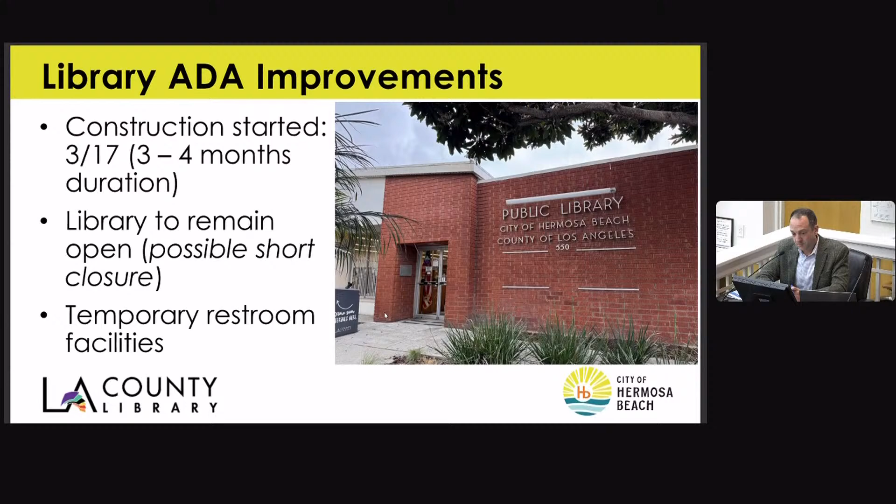And then, I did want to give an alert about ongoing issues at the beach.

And then finally, I want to give an update — Public Works has actively been working with Cal Water for several months now on the ongoing water main replacement project on Bayview Drive, from 2nd to 8th Street. They've concluded all the major work and were just wrapping up some box cover adjustments on the street. We also had to coordinate that with the LA County Sanitation District project that overlapped with it. That effort is now complete as well.

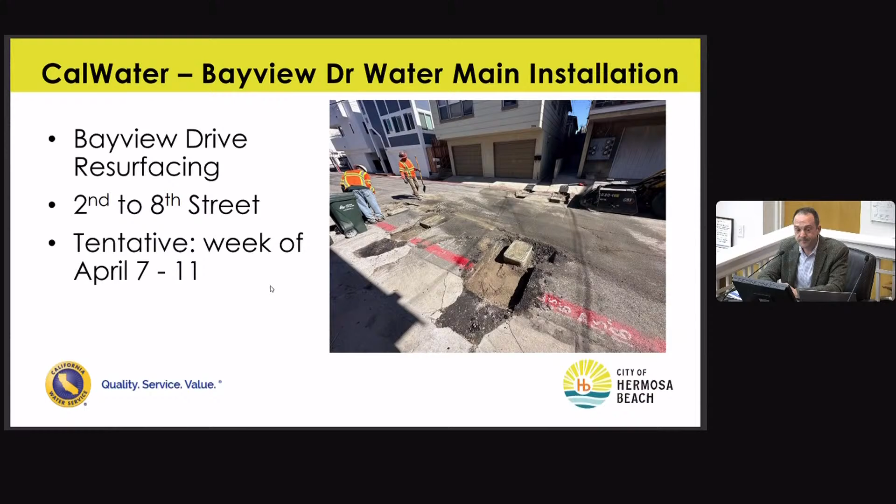We are tentatively set to do final resurfacing work on Bayview — a full grind and overlay of Bayview Drive. We're tentatively looking at the week of April 7th to complete that work, and additional notifications will go out to that neighborhood once it's final and confirmed. But that's what we're looking at right now to conclude that project. Those are my short updates tonight — happy to answer any questions you might have.

Any questions to my left? To my right? Just real quick on the Bayview resurfacing — is that part of the water project or part of the street improvement project? It's all part of the Cal Water project. They were going to do restoration, but there were so many lateral connections and major work done that it required a full grind and overlay. Otherwise, it would have been a lot of patchwork. Okay, thank you.

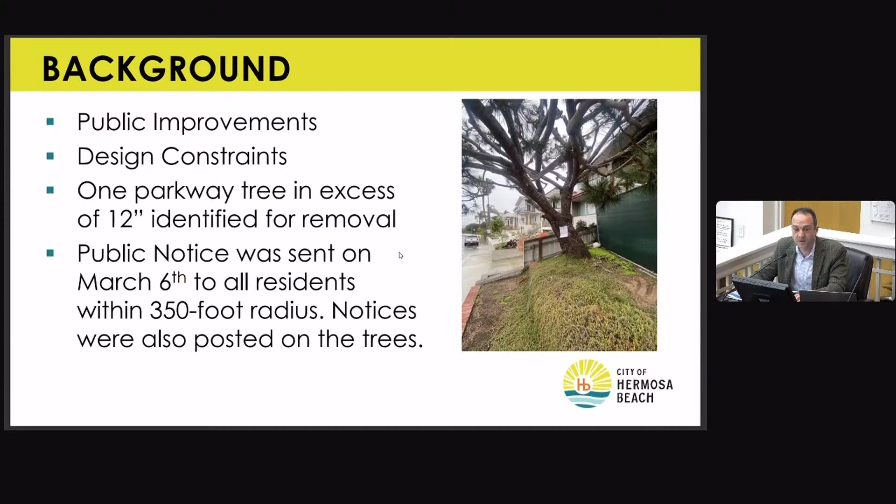The tree does exceed 12 inches in diameter, so it requires a public hearing for removal. Staff worked to issue notifications within a 350-foot radius of the area, and we also posted a notice on the tree, which is our standard practice for extra notification to the community. Here's a quick overview of where the property is on Monterey Boulevard — the tree is in the parkway behind the sidewalk in the frontage of the property.

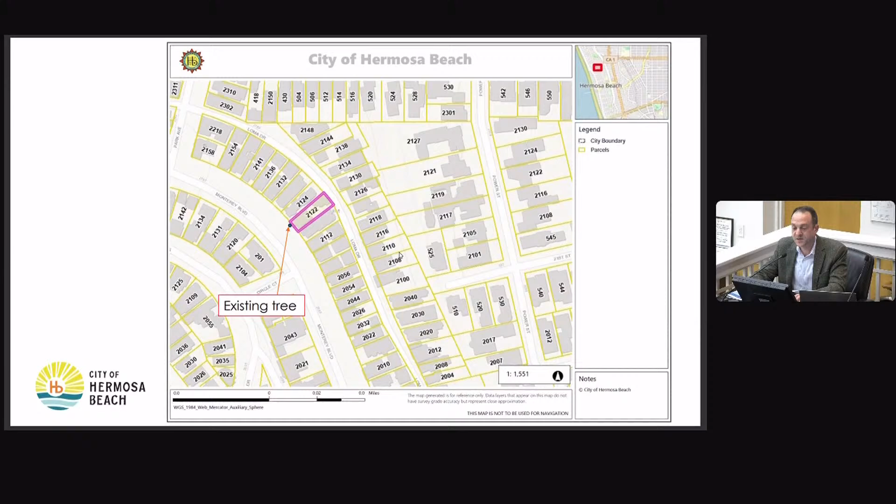This is a zoom in that shows the dimensions of the current layout. There's currently about a 5.5-foot wide sidewalk on Monterey Boulevard and about a 12.5-foot wide parkway that remains between the front property line and the back of sidewalk. The tree is located inside that 12.5-foot wide parkway location, shown in the green area.

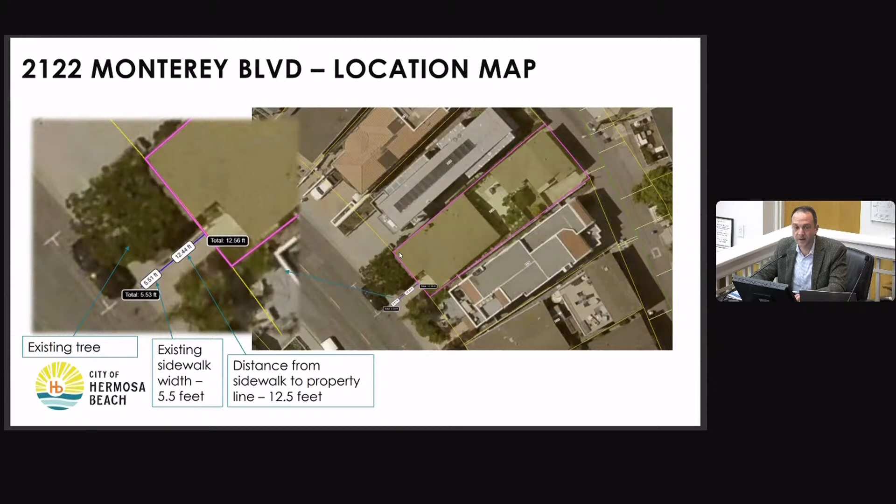The proposed condition would bring the current encroachment area up to conformance, consistent with Hermosa Beach Municipal Code Section 1216-130, which requires any substantial redevelopment exceeding 400 square feet to remove non-conforming elements from the encroachment area. We are working with the applicant to provide an encroachment permit for this area once they vacate the non-conforming structures, which include the retaining walls and the staircase.

The staircase is getting pulled back and rotated, I believe, 90 degrees, and pulled completely onto the property line, and all the retaining wall systems would be pulled back as well.

The challenge is that the tree, being 5 feet higher than the ground elevation, sits atop that wall, so it would be extremely difficult, if not impossible, for the tree to remain while removing the non-conforming encroachments from that area. So in order to comply with municipal code 1216-130, they are required to remove the tree as part of the project.

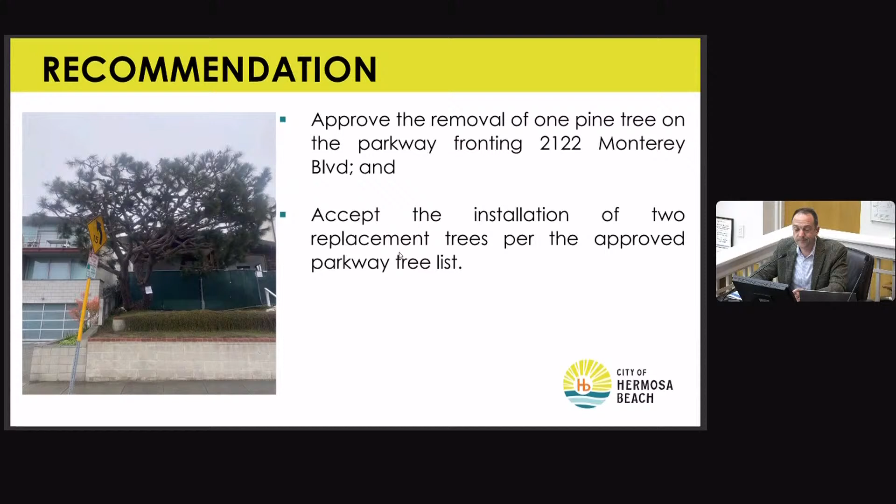So for tonight, the recommendation is for the commission to consider approval of removing this one tree and accepting the installation of 2 trees per the approved parkway tree list within the encroachment area. And that concludes my presentation.

Does anybody have any questions for staff?

I do. I had asked a question with one of the engineers, with Jonathan, before the meeting about the distance from the existing sidewalk to the property line. Is that not 14 feet, or maybe I got confused by that 12.5-foot number you had there?

Thank you, Commissioner Graith. I believe that it was an estimate of 14 feet, and he did clarify when he put together the slides for this evening that it's 12.5 feet. So it's a little bit less than what we thought. But the tree is within that area.

So, are we confident that the tree is in the public right-of-way and not on private property? It's absolutely in the public right-of-way, between the property line and the back of sidewalk. I have 100% confidence it's in the public right-of-way and not on private property. Okay, then I will defer to your 100% confidence, because maybe I made a measuring mistake today.

I was just going to, as part of my questioning, also disclose as part of my ex parte disclosure that I did do a site walk today. I saw the condition there. I noticed that there are retaining walls, and they actually occur in sort of a tiered fashion on 2 levels. The upper retaining wall, in some sense, surrounds a lot of the soil at about the level where the existing tree resides. It also looks like there's at least about 28 feet of frontage width on the property.

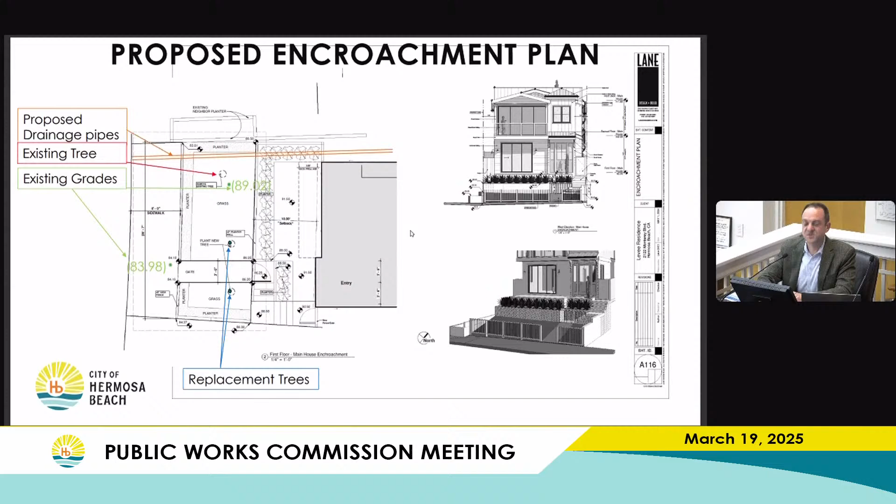Can you just put up the drawing that showed where the 2 trees are going to go? Absolutely. Thank you, Andrew. Okay, so they are on either side of the walkway, set back almost the same distance as the existing tree, perhaps a little bit further.

I guess my question is, is there a reason to not put them closer to the street? Although, can you tell me approximately what's the distance from the new tree to the house? My screen is terrible, so I can't see. There's a couple dimensions in there, but yeah, looking at it, it looks about 4 feet from the property line, about 3.5 to 4 feet from the property line.

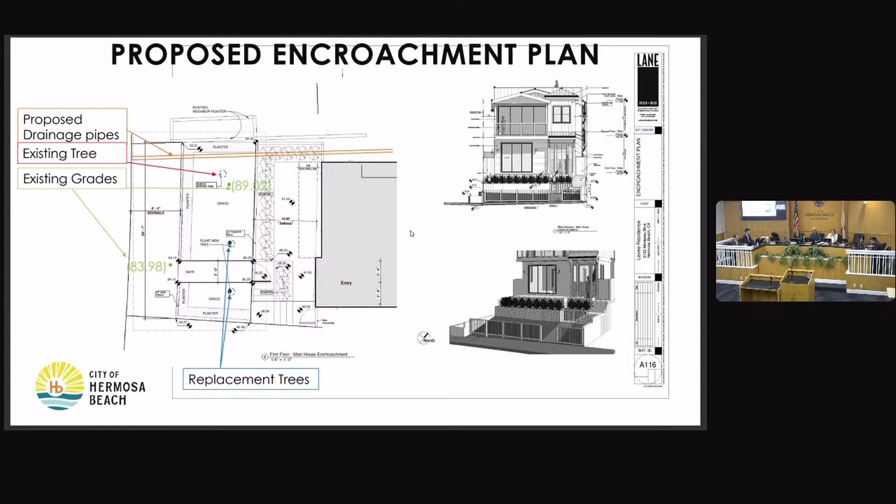My concern is because we see some trees are planted in the public right of way, but they get too close to the houses and interfere with gutters and stuff like that. So that would be...

Is that position set? Was it set by Public Works, or was it set by the homeowner? This was proposed by their design team, so we didn't make any requirement of where it was. This is their proposal for where those two trees would go.

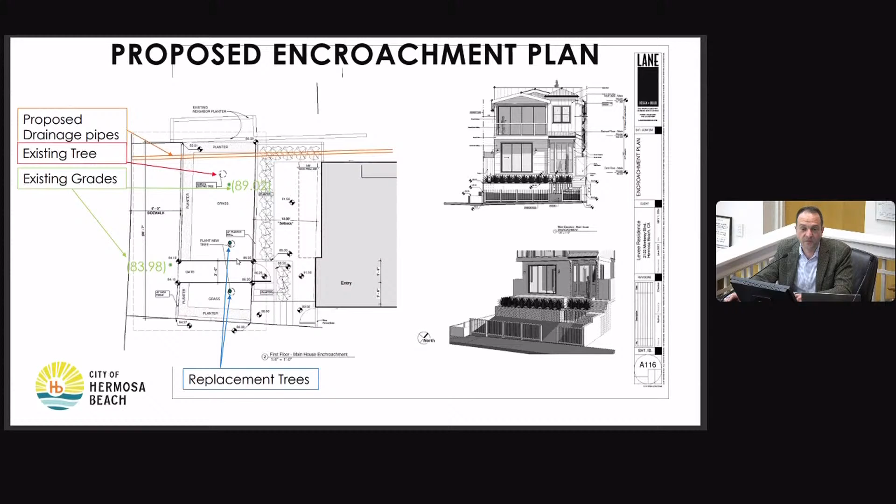Okay, alright, that's it. If there's no further questions, we move on to public comment. If there's anybody wishing to speak on this item, please speak now.

Hi, good evening. My name is Romaine Levy. I reside at 2415 Myrtle Avenue in Hermosa Beach, and I'm the homeowner at 2122 Monterey. My husband Tom is with me. Thank you to the Public Works Commission for your thorough report and for considering this issue.

And thank you to Commissioner Britton for your motion to hear this item earlier in the evening. We appreciate that. I am here just to confirm everything that I heard in the report tracks with our experience. We did our best to comply with everything that Public Works had asked for us to do on that encroachment space and encouraged our designers to comply in any way they could. We're sad to see a beautiful, thriving tree be taken out, but happy to replace it with two new ones that will hopefully grow to be as large and healthy as that one is. So we're excited to move forward, and thank you all for considering this tonight.

Thank you. Do you have any questions of us? No. Okay, anybody else? Thank you. Alright, that will close public comment.

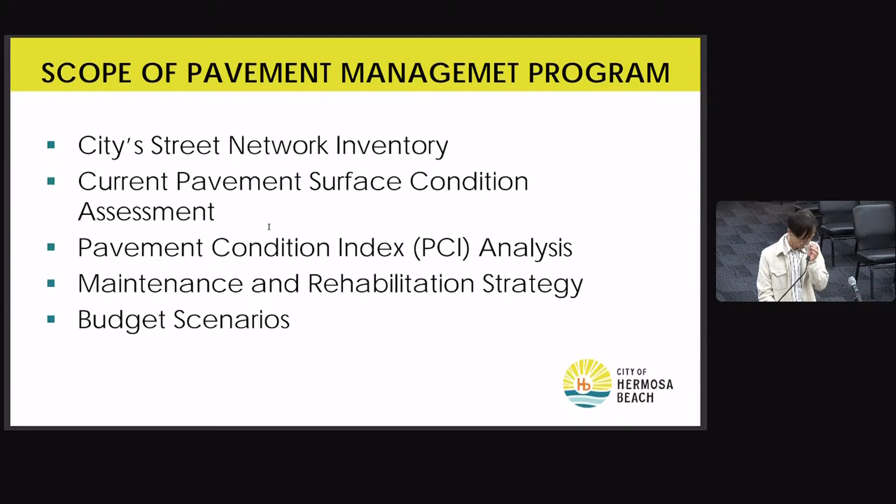The city network consists of arterial streets about 6.8 miles, collector streets about 10.3 miles, local streets about 30 miles, and alleyways of 0.5 miles, totaling 47.6 miles, excluding PCH and Walk Street. The PCH is maintained and owned by Caltrans.

The consultant assessed the current street and pavement condition, performing field observations in October 2024, visually observing all street conditions such as cracks and other types of distress.

An important term here is the pavement condition index, or PCI. This is the measurement of pavement grade or condition and ranges from 100 to 0. The PCI value is analyzed based on factors like climate, traffic load and volume, paving materials, age, and field observations. For example, a newly paved street will have a PCI of 100, but a street near the end of its service life will have a PCI of 40 or less.

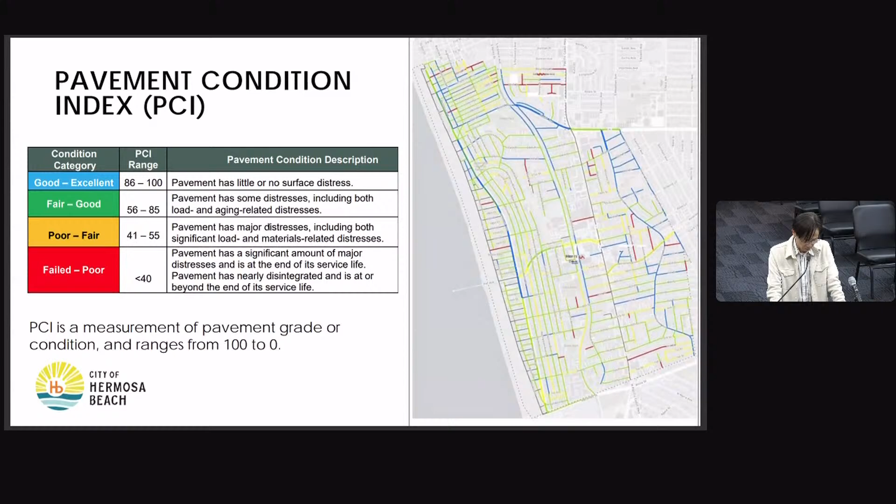That is part of our upcoming street project. That's why I chose our street, Pier Avenue, which is in kind of bad condition, and we chose the overlay and grind and overlay for this time.

This slide shows sample street conditions. The Ardmore Avenue segment is about 95. As you can see, the picture is very nice without any major cracks. But the bottom avenue, Power Street, is really bad condition for now, and that street is added in the upcoming annual street project.

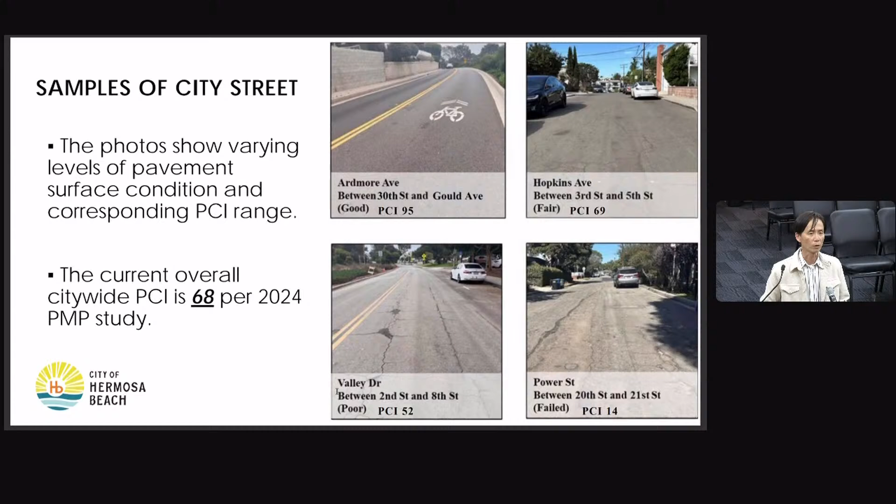Based on that, the current overall citywide PCI is 68% for the 2024 PMP study, but it was 70 before the 2021 PMP study. So it is decreasing compared to the 2021 study.

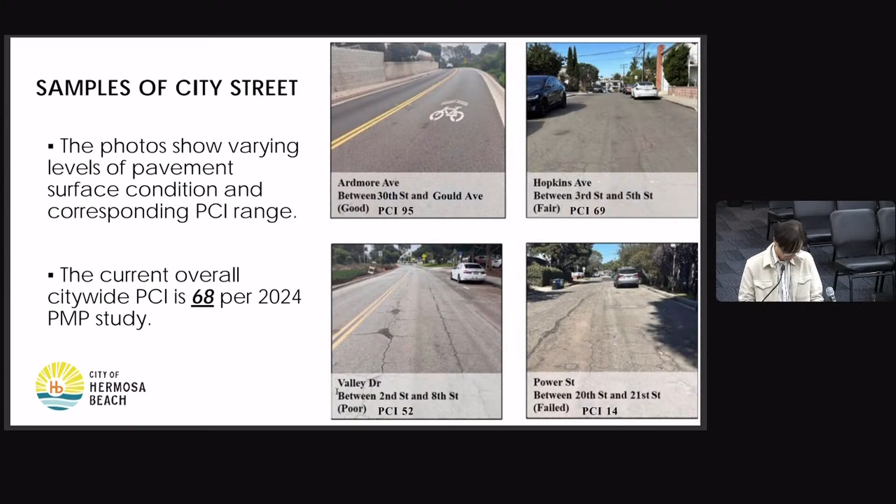There is another term, budget scenarios. The estimated current city annual funding is $1.5 million. The funding sources are Measure M and Measure R, and also Prop C and Prop A, and then also the Senate Bill number 1, called SB1 funding. There is also the city general fund we can use for street paving.

The unlimited budget is the highest cost option. In total for 10 years, we may need $42.3 million. The first year we need $26 million, and the next 9 years, $1.8 million every year. As a result, the PCI value is going to increase to 86. But that is a very optimistic number for the funding levels.

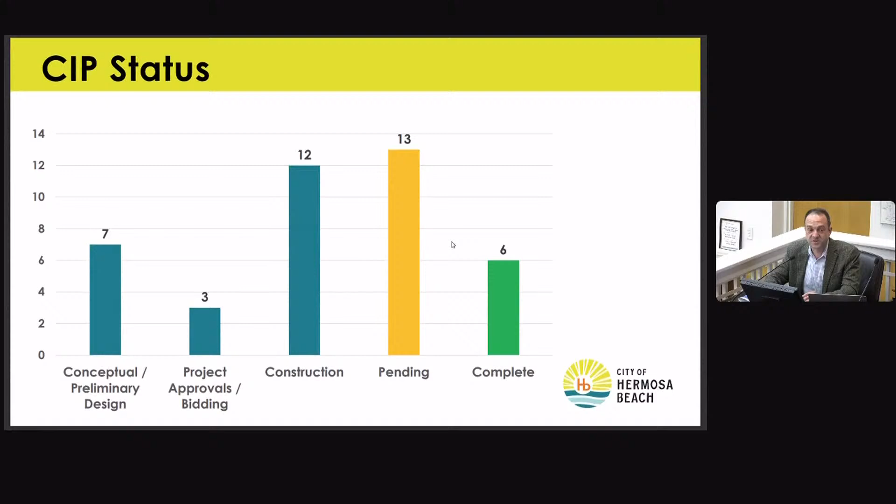I'd like to give an update on some things we are wrapping up. Our Greenbelt project, which is really 3 CIPs in one, was substantially complete February 12th, when we opened the northern half. We had opened the southern half, from 8th Street to 11th, right after Thanksgiving into December, and then opened the northern half of the pathway just in February.

There is still ongoing work. While it's all open for use, we have a number of punch list items being completed. We have additional grading work happening on 11th Street, and we'll be bringing back the contractor for some additional hydro seeding, since we had a lot of rain and some of it got washed away. It's been difficult to schedule with the weather, but they will be coming in the coming weeks. So there's a little more work to do, but it is largely open for the public's use and enjoyment.

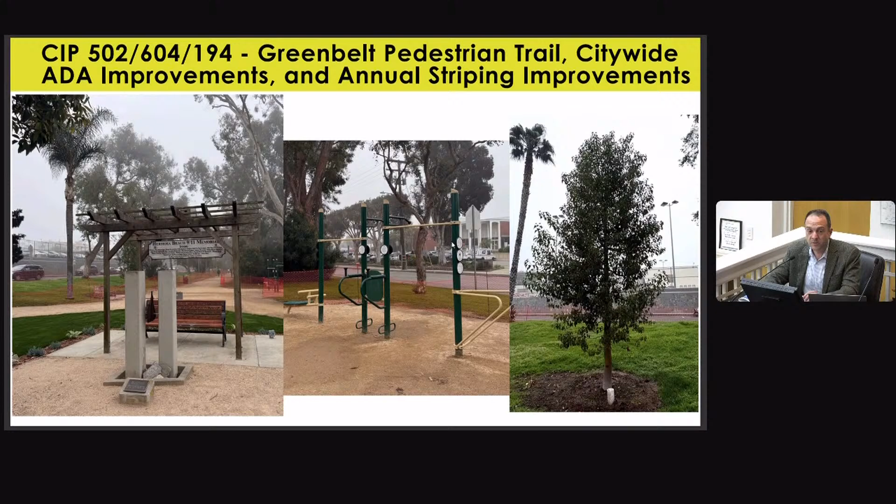It's a little small in the picture, but you'll see one of the new trash cans we've deployed. That purchase was made as part of deploying trash cans throughout downtown and in parks, unrelated to this project, but we wanted to make the switch at this location too, so you'll see the new trash cans and the pad that went with them. There are also a number of sidewalk segments and curb ramps that we brought up to current standards and rebuilt.

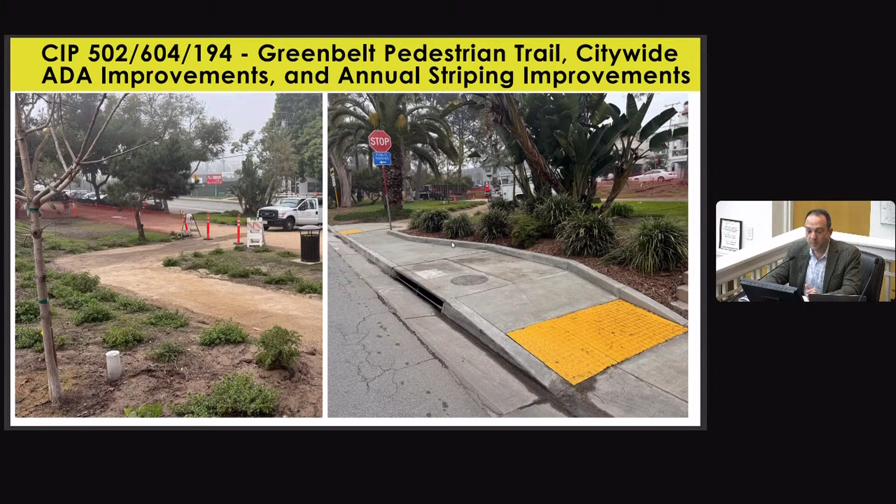On the right-hand side is the Valley Drive side of 11th Street, where we have a new enhanced connection to the parking lot. So again, this isn't just a DG path — there were a number of other elements included to bring this whole section up to standard with additional enhancements. Moving down in front of the Clark building, one of those enhancements was adding a rectangular rapid flashing beacon at the crosswalk for enhanced traffic control between the Greenbelt and the ADA parking.

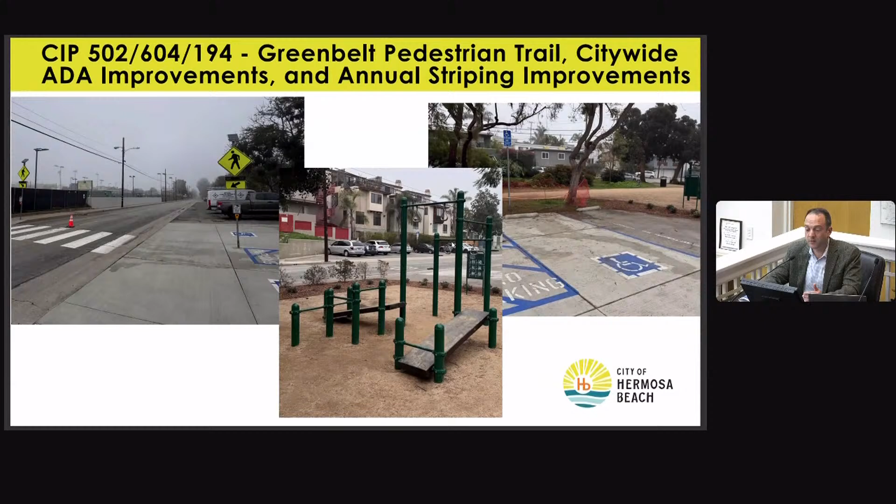We installed 2 new concrete pads to update the ADA parking along Valley Drive, and in the middle is the second set of gym equipment that was added, down at the southern end near 8th Street. A significant amount of new plantings went in — the picture on the left is near 8th Street and Valley. In the middle, you can see all the new sidewalk added across 8th Street and some new grass, and there will be 2 new bench locations. On the right, the concrete pad extends a bit beyond the bench for wheelchair accessibility adjacent to it.

We are working with the naming committee designated by City Council, and we will be bringing something forward soon for that, and ultimately a ribbon cutting in the coming months. We're waiting for more of the plants to establish, but that is hopefully to be scheduled in the next couple months.

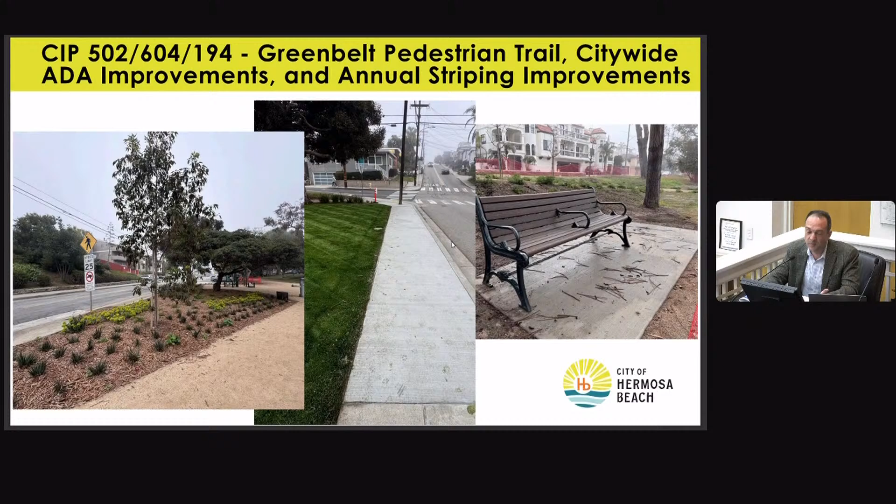Moving on to our storm drain project on Bard Street. This project was definitely completed ahead of schedule. We had anticipated up to a couple months to complete this work, but they did most of the major construction in about 2 to 3 weeks.

This is at the intersection of Bard and Oak Street, to really capture a lot of that water that was coming off Oak Street and pouring into the residential neighborhood at the mobile home park to the north of it. You can see the new storm drain line that was added, a new large catch basin to collect the water, and a new access hole that was installed. We did go out and inspect, and all reports seem to be that it was fairly successful in catching the storm water, so we do think it was a success.

We have just one of the last remaining elements to come back and schedule the striping work, which has been delayed given the weather. But once the striping is in, the project will be complete. Thank you to Heat Chill for helping advance that project as well as our other team members.

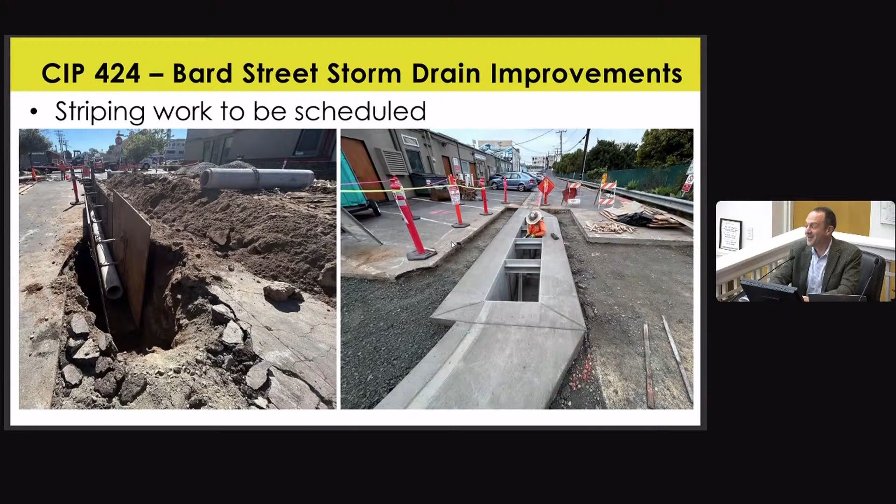Clark Building, we are roughly at about 70% complete. I have a handful of photos to show some of the great work that they're doing there. We are continuing to advance.

On the left-hand side are the new heat pump systems, our AC units, and some of the decorative fencing that will go around it. This is on the west side between the baseball field and the back of the building.

The crews are actively installing all the hand railing systems around the periphery of the building. The picture on the right is between the Clark Building and the lawn bowling facility, where there will now be an accessible ramp not only to the Clark Building but to the lawn bowling facility. So we are actually updating access to that adjacent facility as well through this construction.

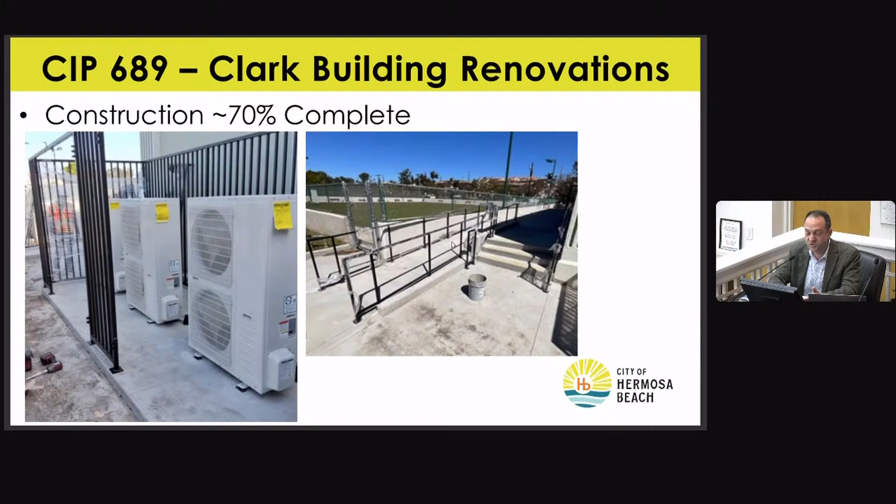As you move inside the building, in the middle, we've been doing a lot of the mechanical systems in the roof of the facility. There were some challenges as they got into the attic while routing some of the mechanicals, but we were able to work things out in the field with the contractor, and that continues to move forward.

The photo on the left shows the kitchen with some of the drywall going up, and they're working on some of the layout. All the rough plumbing is complete. The picture on the right is inside the ballroom, where they're also working on some of the drywall installation.

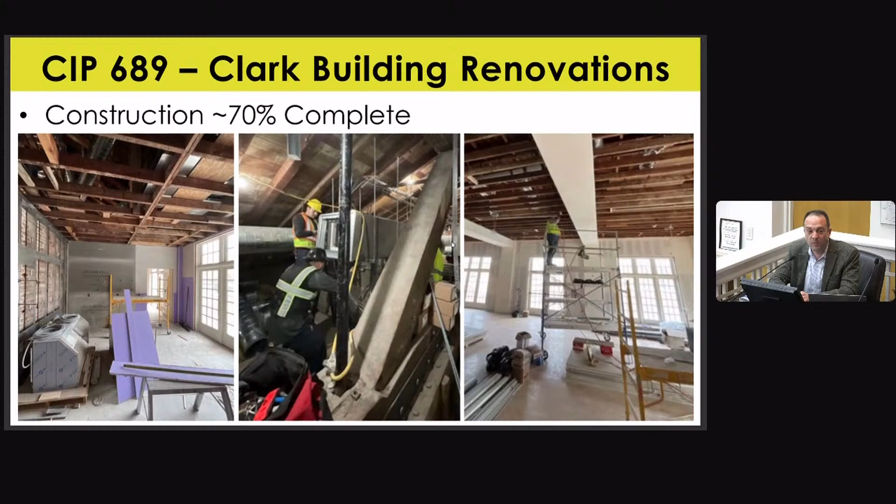Moving on to utility box wrappings. This is a project that has been ongoing for some time in partnership with Indivisible Arts, where they've been helping bring in local artists for each location.

There are a number of hand-painted locations, and we've actually started work on some of the wrapping through our public works crews. We have a print shop, and we're now able to print the wraps. We've been working with artists to prepare the art and make measurements so that we can print the large stickers that go on. It takes a lot of skill. Our talented Rudy Molina, who is doing the wrapping, has really gotten amazing at doing some of these, and he's actually working on one of them on Pier Avenue now.

Are you also considering wrapping the Public Works cherry picker as one of our art projects? Maybe in the future.

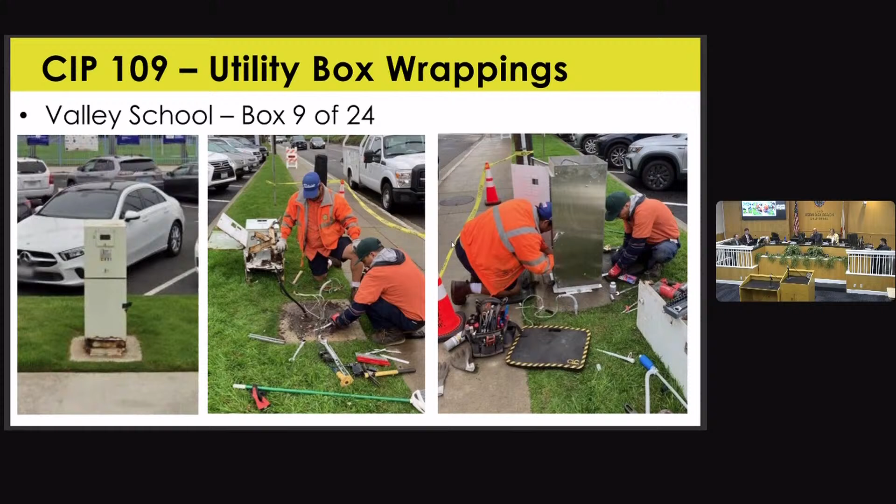They are actually wrapping vehicles. We are doing the decals now. There's a number of needs when we get new police vehicles. Not to get too far off the subject, we are doing some of the wrapping that is required on the vehicles, but it is one of the new capabilities our talented team has.

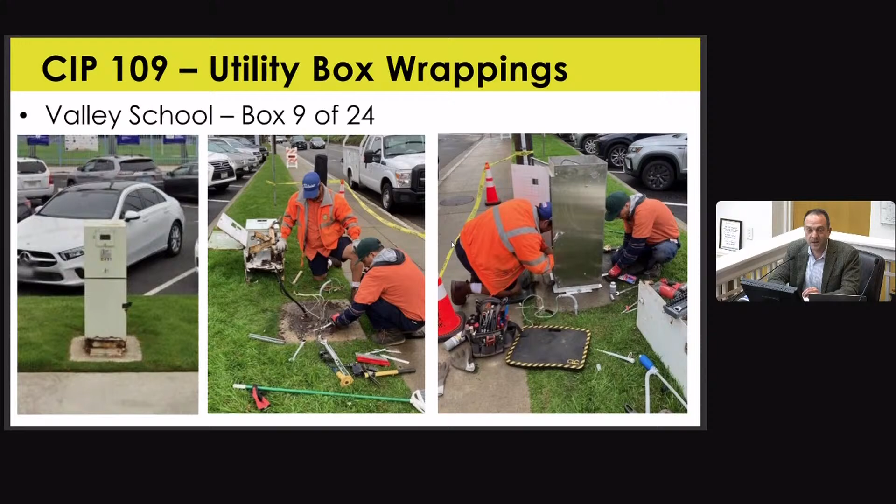One of the other boxes that we worked on was in front of Valley School and Valley Drive. This actually did require, this was in very poor condition. Our crews coordinated the removal and installation of a new box. We had to coordinate with SCE and the school. We actually had to do an outage in order to install this because the signal was tied to this, so we had to coordinate that work. They put in a new box, and the artist recently completed the installation.

There's actually a dolphin to match the logo for the school. They have a dolphin shown. I think it's possibly their mascot for the school, so check that one out. It looks pretty good.

And I think there's a couple that are still in progress. These are hand-painted ones. This one's on Hermosa Avenue, and we have another location on Gould Avenue that's actively in progress but nearly complete as well. This is as you come down the hill from PCH on the north side of the roadway, tucked in the trees. So that's our utility box wrapping project, and we have a number of other art installations in progress and more to roll out in the coming months.

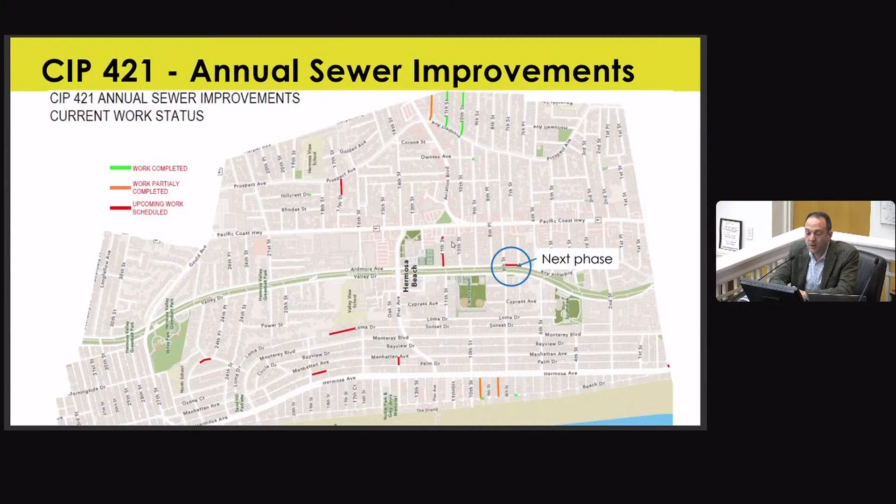Moving on to the annual sewer improvement project, we are currently about 30% complete. They are actively wrapping things up off of Prospect Avenue, and we are going to be moving into one of the next phases. I've color coordinated here, I apologize if it's small, but there are several locations that are complete, some partially completed locations, and we're actively working to schedule additional work. As we're moving from area to area, we are reaching out to neighborhoods and businesses as we move into the area.

So the next phase is Ardmore between 7th and 8th Street, and they will be starting there on Monday. It's expected to take about 2 to 3 weeks. This is a complete replacement of that sewer line. We are working to expedite this to get off of Ardmore before any of the Pier Avenue paving work begins, so we're trying to make sure that we're not on Valley Drive at the same time. So we're working on getting Ardmore completed.

This will require a full road closure between 7th and 8th Street on Ardmore. There will be turn restrictions at 7th and 8th Street on Ardmore, only during work hours. They will plate it, so during the evening we'll restore access, and there'll be access on the weekends. So we're actively working to issue notifications to the impacted residents and through other e-notifications, just getting the word out tonight as well. So that's coming soon.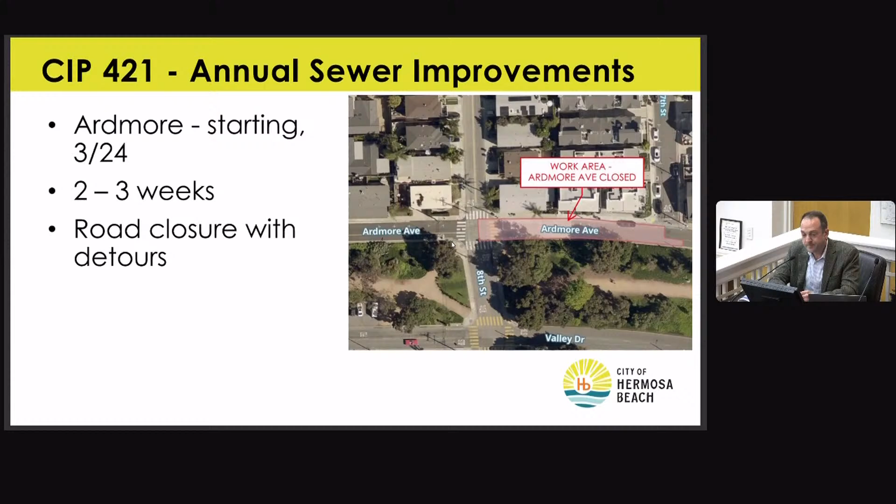And then our paving project. We awarded the contract on February 25th. It is a very large project, a $3.2 million contract award. Some of the big pieces being Pier Avenue, Lot A, Valley Drive, but there are a number of other high-priority residential streets like Power Street and several others that are really in that critical condition that really need paving. There is also some sidewalk repairs and curb ramp improvements as well.

But what I would like to emphasize is that we are working to minimize the impacts the best that we can. Excuse me, I'm going to have some water. Thank you.

So we have issued initial construction notices to all the residents and businesses along the Pier Avenue and Lot A corridors. We were originally looking at a potential 4 to 6 week timeline to complete those major paving efforts. We do believe that we can significantly condense the durations for those locations. We actually met with a contractor today, and we're working on finalizing what the schedule is going to look like. Right now, there's a tentative start date on Pier Avenue, and so we are sequencing this work to minimize overall parking impacts and impacts to the downtown.

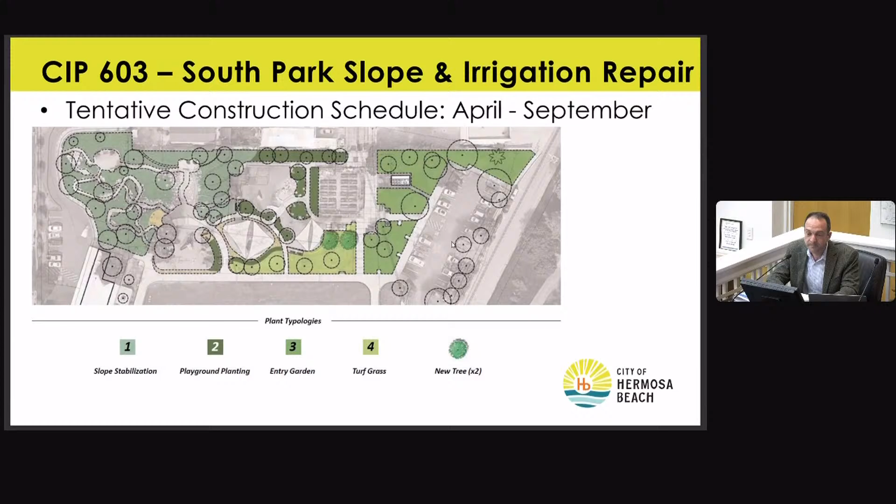Our pier structural inspection work through last fall through December, we completed a very detailed above and below water inspection. This included divers that went out to look underwater and very close visual inspection. We used a boom lift to get underneath so that they could really investigate the underside of the pier, very close inspection. We've been working with our structural engineering team, a consulting team that's out there who are experts in pier structures, and we are performing additional testing to supplement the visual work that was done.

They have an ambient vibration testing that we are doing. We had conducted one smaller test on one individual panel earlier this year, a few months ago, and now we're expanding that to several locations so that we can really get a closer look at several of the concrete panels on the deck to compare that testing with the visual inspection.

The hope is that through this inspection or testing work, we could potentially reduce the amount of recommended repairs based on the visual inspection, because visual really accounts for where we can see cracking or other structural defects. Through using this ambient vibration testing, we can get a sense of how the individual concrete panels of concern are performing, to determine whether there's anything we couldn't visually see that was undetected, but more importantly, whether some panels may not need replacement because they're actually performing better than they appear through the visual inspection. So that's the hope.

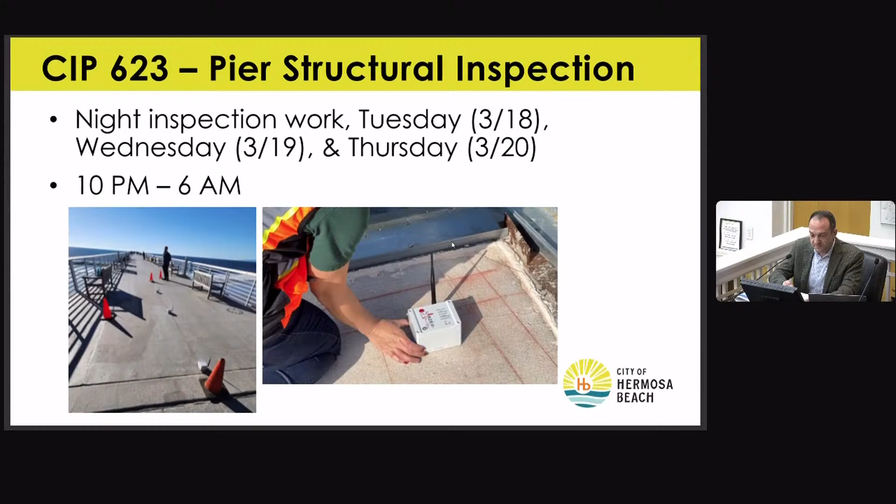CIP 619, February 25th was a busy night. This was the third contract award for consideration at City Council at that meeting. Ultimately, City Council rejected all bids that evening, and they have directed staff to go to the Parks and Recreation Commission and then subsequently the Public Works Commission for further consideration. The discussion that evening was concern about how many pickleball courts were active, and to get further community feedback on that.

Just a quick overview: the project was going to do a complete renovation of all courts, resurfacing and replacing the mesh on all the fencing. Really the biggest piece of this was bringing all the courts up to current dimensional standards, which was one of the main drivers of why 2 of the 4 existing pickleball courts were closed. 2 remain closed, and this plan was to bring it up to dimensional standards to restore what was there.

There was a fair amount of discussion about whether there should be 2 or 4 pickleball courts at that location. Staff is working to get that on the Parks and Recreation Commission agenda, potentially as soon as next month, but to be determined. And then we would bring it to this commission afterwards before bringing it to City Council for further consideration on how to proceed.

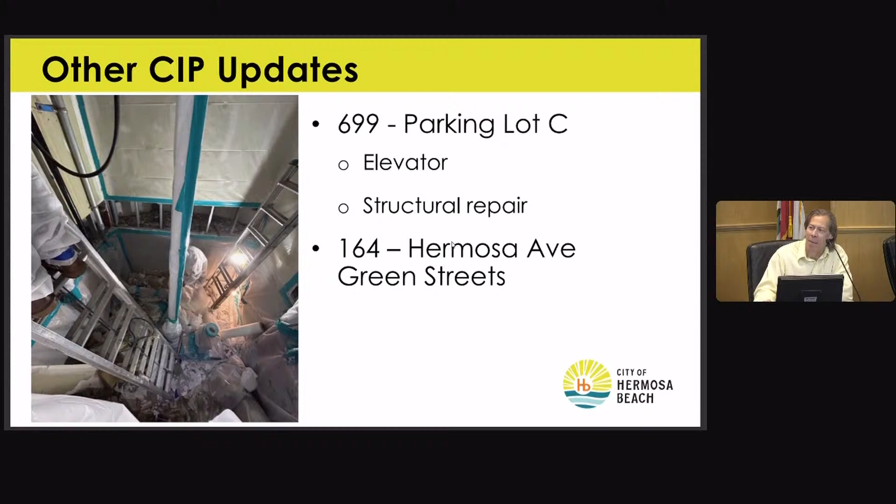And with that, that concludes all my updates. I'm happy to answer questions, anything I showed or anything we didn't cover. I've got two questions, you covered my other two already.

I'll just make a general comment. Sometimes when we have things that may be kind of visible around town, it's good to roll them out sooner rather than later so we don't get too far into a project and get a surprise. So this Project 111 on page 1, it's the gateway and wayfinding signs conceptual design. The scope of this CIP as currently defined is just for the preliminary design, and we're about partway through. So this seemed like this would be something, maybe before we go into final design, that might be a good time to roll that out and give the public and some of our decision makers some insight as to what it looks like.

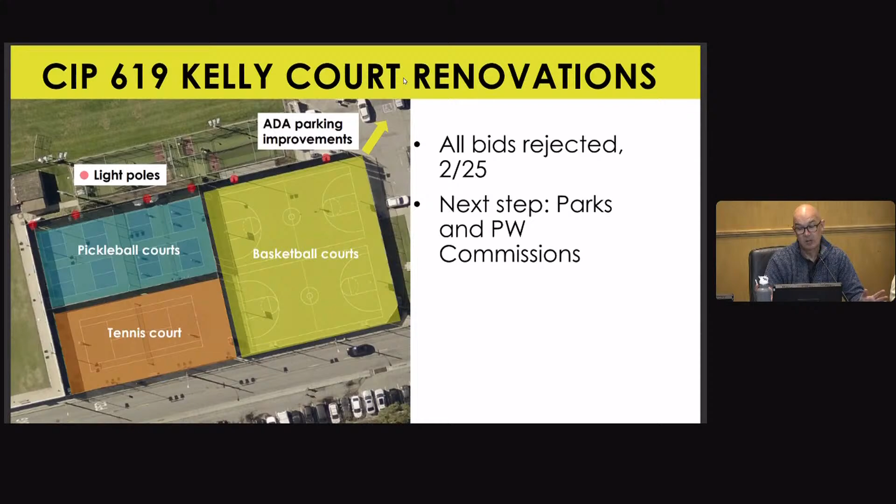Okay, because the council is making it seem like we're making a major change because only 2 courts have been active. And it's very disturbing to me that this plan has been in front of the council multiple times, and they're treating it like they've never seen or heard it before. So that gets into my bigger issue of what do we do, or how can we prevent this from happening again? Meaning preventing council from deciding what they want when we're ready to award after spending all the money for design, bidding, et cetera, and then you decide, oh, that's not what I want, I didn't pay attention, and now I want something different. So we're going to throw away everybody's work.

So what I'll say is we are always open to enhancing our process and getting communication out. However, staff has been very clear that we were going to restore 4 courts throughout the duration of this. I understand that, and you and I have talked about this offline, and I've looked at former meetings, and everybody who says they didn't know, knew, or they weren't paying attention.

But my question is, do we need to have, whether it's staff, council, and commissioners form a committee to determine how to, at what stage and for what types of projects do we bring this up to council early so they feel like they've been informed, even though they are being informed, so that this doesn't happen again, because it's just going to keep happening.

Right, no, and I think it's a good question, and it's also our concern as well. I mean, we want the community to be happy with the projects that we're advancing. We have limited staff bandwidth to work on any of these projects, and so every hour that we put into one of these projects is critical. If we have to do it twice, it means that something else gets delayed because of it. And so we do have to be very careful with our time.